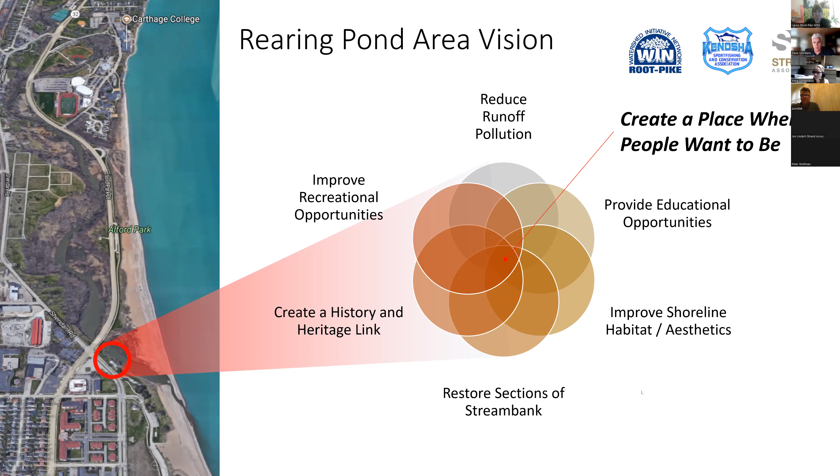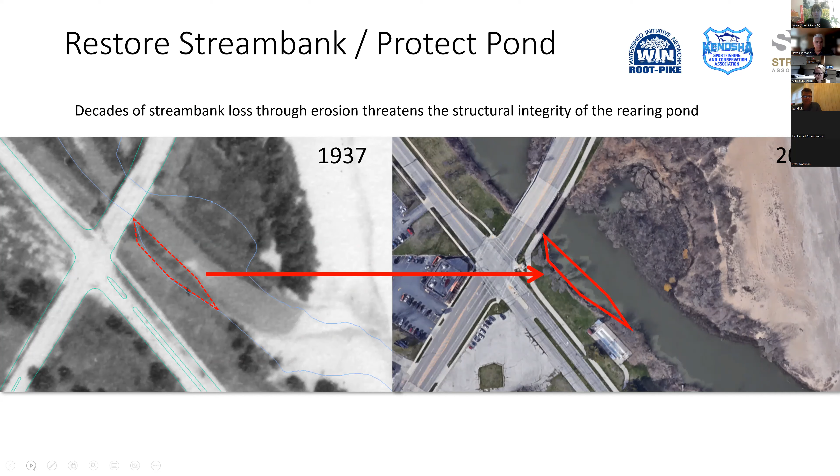So there's a lot of runoff pollution as well. I grew up in Kenosha, spent a lot of time on these beaches. It's sad to see it in this state. And so a number of us have gotten together as part of the Root-Pike WIN initiative to try and deal with these issues.

So we're going to do some things with the shoreline, mainly eradicating some invasive species and getting natives back where they have deeper root systems. We're also going to look at educational opportunities that connect people back to the heritage here, this area.

You know, there are historical accounts that this area was really kind of discovered by an explorer whose horse fell in the river. And the next day he saw a canoe by the shoreline and decided to take that upriver and thought this was an incredible place. And hence the founding of Kenosha, or the place of Pike. So there's a rich history there. There's an awesome history, and we want to be able to tell that through some interactive, some signage and things like that.

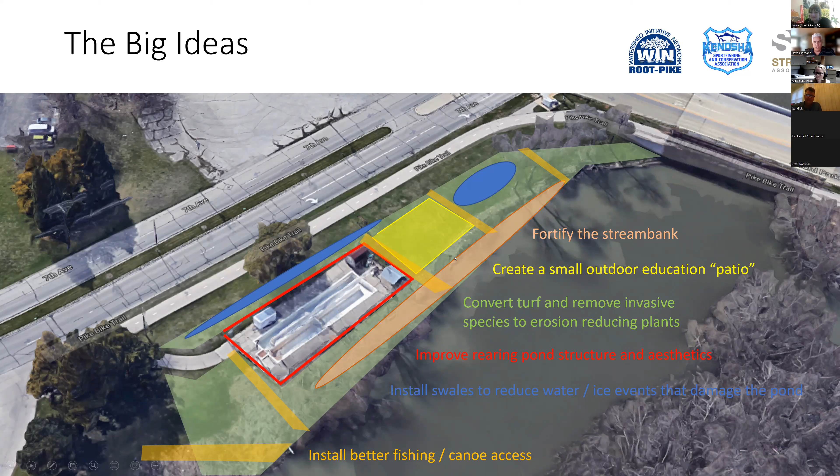Jim? All right, now can you hear me? Yes, okay. We can.

All right, so a little history of the pond. The pond started in 1973. A gentleman, his name escapes me, but he tried 3 times to show the DNR how a rearing pond is needed for increasing fisheries for the rivers and lakes, for Lake Michigan. So the club, Kenosha Sportfishing Conservation Association, was formed.

So the pond was built, there's 1,000-foot well water that comes into the pond. It is fed from a natural water base. It's the only well-driven rearing pond in all of Southeast Wisconsin and the entire state. In fact, we have the only effective well-driven pond. And back in 2010, the green hose you see to your left here is an imprinting program that was started.

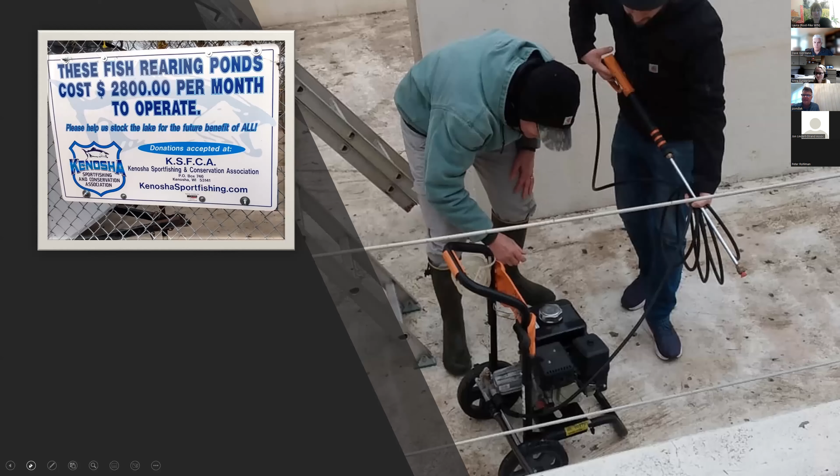The Sportfishing Club is a private club that is all funded privately by area donations. The people that you're seeing in this picture, just to run the pump for a 4-week program is $2,800, and that's just electrical use. The rest of the money that was donated is all by volunteers, power washers, sprayers, volunteer hours, the feeding of the fish and the releasing of the fish and the cleaning up the pond for its winter hiatus for next spring.

So this pond is only operated with the DNR giving us the fish and food. The rest of it is all done by the Kenosha Sportfishing and Conservation Club, which is a club that's been around since 1973. I did some numbers today. We're at 1.9 million fish reared in Kenosha since 1973, which brings anywhere from $3.5 to $4 million of tourism yearly to this area. People from all over the United States come for charter fishing.

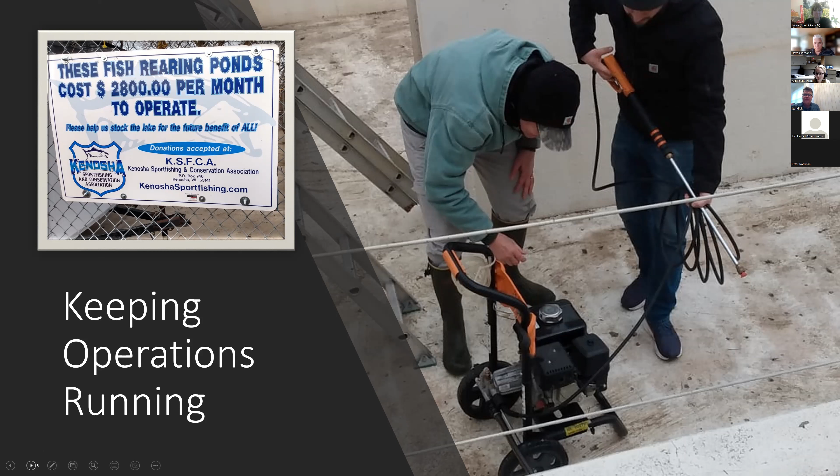People come for shore-bait fishing. People use the hotels, the restaurants, even the area businesses of shops also get visited by people from as far as Germany. So what you're seeing here and the tubes you're seeing is that the fish come in from the DNR Wild Rose Hatchery, and then we keep them for 3 or 4 weeks.

It depends on the DNR, but our well water is so unique. It's at 52 and 52.5 degrees consistently. Our well water is the best water these fish could ever be reared in. So we give the fish a supplement of food that the DNR supplied us. And as we finished this year, our fish grew 1/4 inch in 3 weeks. So we had one of the healthiest rears that we ever had in a very long time, according to the DNR biologist that gave us the data just recently.

So our club is privately held. We go out and seek fundraising. What we feel brings this community closer on the pond is the fishery, and the fishery is beneficial. As we all know, it's nearly a $1 billion industry, and it benefits the city, the Kenosha area businesses, and also, not to mention, the education of kids and the next generation of fishermen and fisher ladies that come in and enjoy what we're doing. So at this point, that's where our Kenosha starts at.

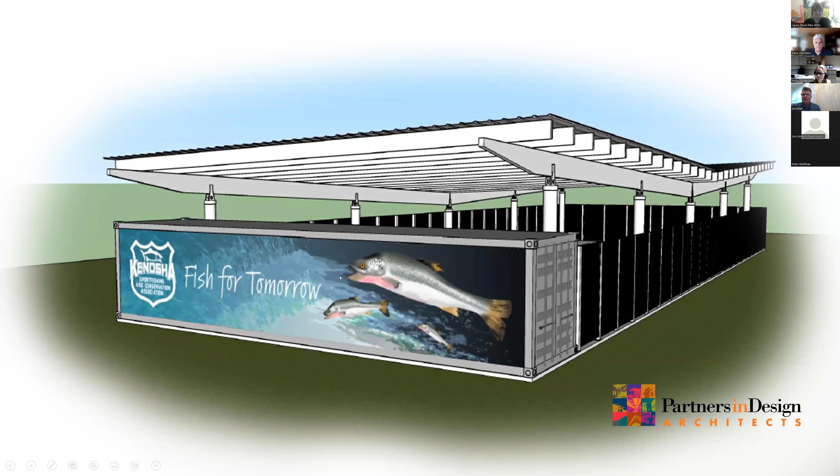So the reason we want this to be where we're at is that we have to teach young kids and students about where the fish come from, how do they start, where do they end up, what's their return rate, what are these fish all for? Well, the Sportfishing organization is about the community, and this is a community-driven pond. This is not just about a bunch of people enjoying one thing, but it's about community, bringing people together, people enjoying the idea that they're rearing fish that are going to come back in 3.5, 4 years, and they gave them the best opportunity at the infant stage.

So the fingerlings left here at about 5/8 of an inch longer than when they came in. So that's where we're at right now today. So at this point, the pond is of age, it's been around since '73, and it's been out in the environment, and it's done very well.

But if you want to keep something as prestiged as this pond is and keep the river going with the return of the salmon, this pond needs to be one of those iconic things that need to be, not saved, but more or less preserved, because the fact is that this is a heartbeat of Kenosha, and without the pond and its...

What is happening with the local sport fishermen's organizations is, and let's just say it for what it is, it's hard to get kids and young adults involved in sport fishing just because of all the extra electronics we have, but we are working to get children, young children, moms and dads involved out in the Great Lakes. And so that's how this all started.

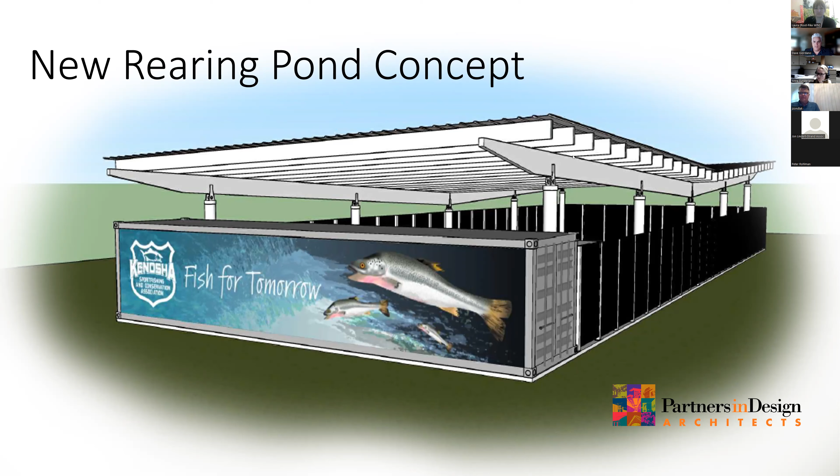So I am going to now share my screen with you. Are you ready? Yes. All right. Let me know if you can all see that. There we go. Looking good. All right, awesome. Thank you, Dave.

So I am going to be focusing on the area around the rearing pond. So where Jim talked about the pond itself, we also have ideas for the surrounding area. Like Dave mentioned, we really want to make this a place where people can come and learn about the environment and become kind of reconnected with this area that's so important to Kenosha.

So the existing Kenosha Rearing Pond area presents opportunities for environmental restoration and recreational improvements that Dave kind of already touched on. I know you've all seen some photos of the site already, but we wanted to show an overview site to orient everybody before we show the actual concept plan.

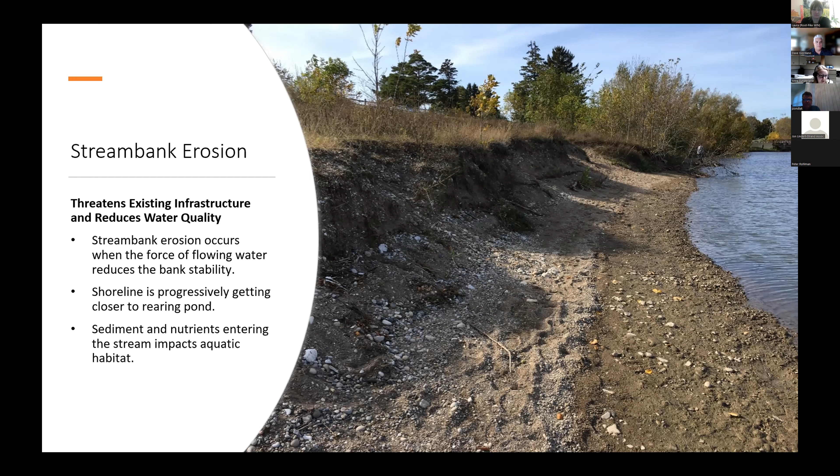In addition, sediment and nutrients entering the stream because of erosion impacts the aquatic habitat. This photo is of the site. You can see there's quite a bit of exposed soil. So as that runoff comes through, that soil then is discharged into the river, and any type of pollutant that is kind of embedded in that soil is then released into the river as well, which greatly impacts the aquatic habitat.

The next option would be a boulder revetment, which is very similar to a vegetated boulder revetment, but you can probably guess that it's not meant to have that vegetation coming up through the actual boulders. So this certainly is a more armored look, but can definitely help prevent that erosion along the banks.

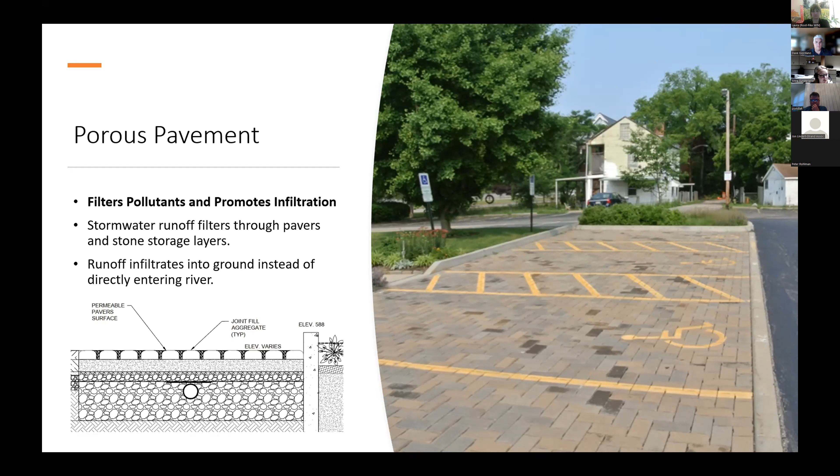So sheet flow and storm sewers carry pollutants and degrade the shoreline. Currently, these storm sewers carry sediments, oils, heavy metals, trash, bacteria, and fertilizer, everything that Dave already mentioned. And that's an issue because it's carrying all of that directly into the river without any treatment. Additionally, outfalls and sheet flow can erode shorelines.

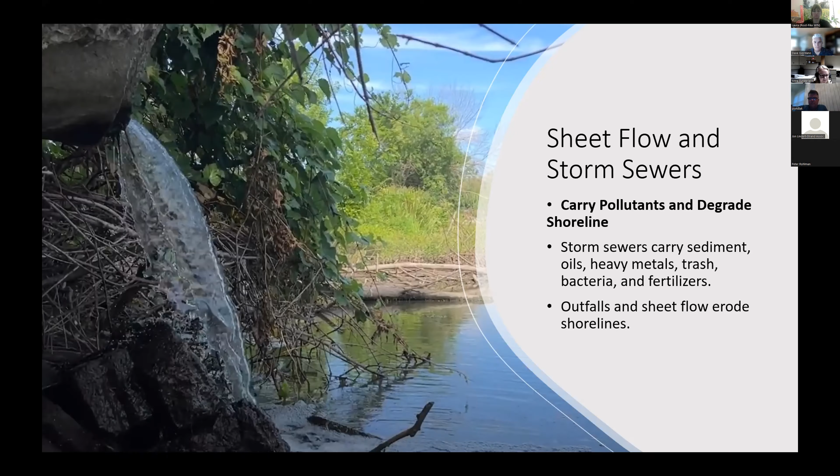So bioretention basins and rain gardens store and treat the runoff prior to entering the river. There's definitely a theme here of stopping that runoff and allowing it to be treated and infiltrated prior to getting to the water resources. But the plantings in these basins can help filter pollutants, and they can also create habitats because they are native species. And then additionally, runoff is stored and infiltrated instead of getting to the river.

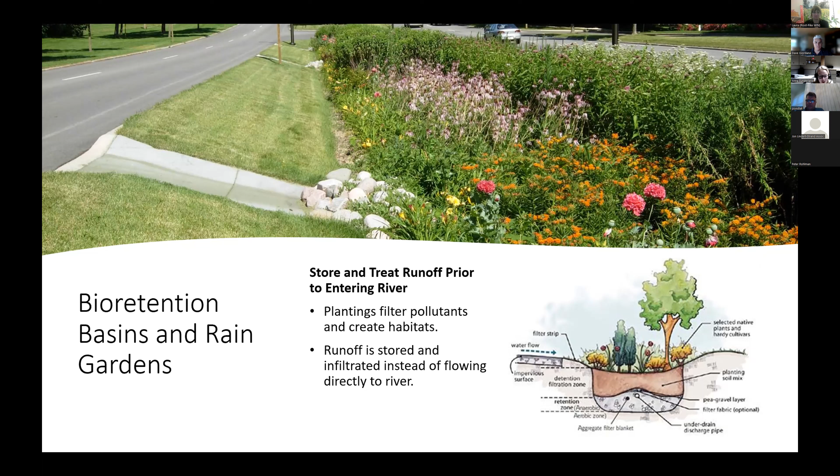As you've probably gathered from some of the other slides, currently untreated storm sewer outfalls are polluting the river and the lake. There's 3 existing storm sewer outfalls on the site, all ranging from 24 inches to 30 inches in diameter. And these sewers carry pollutants and trash from the larger watershed.

These are relatively large storm sewer outfalls, so you can imagine they're collecting quite a bit of runoff from the city, and everything that is found on the streets and the parking lots eventually makes its way to these outfalls. And so currently the storm sewers at this site flow to the river with no treatment.

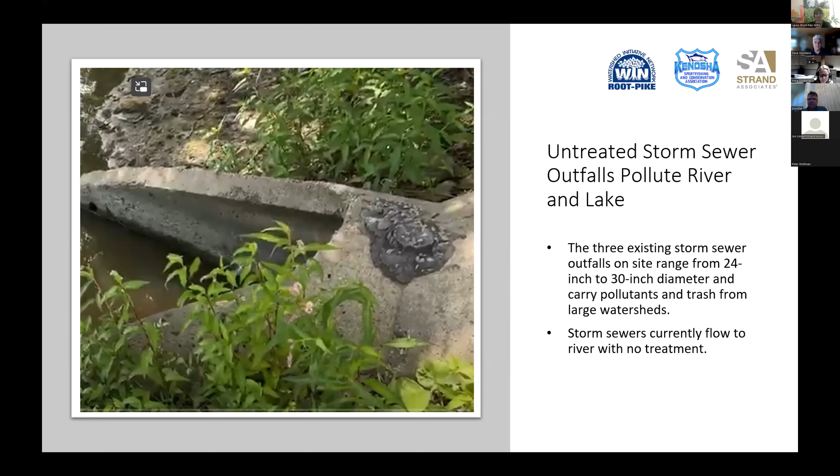So end-of-line treatment options help filter out sediment and pollutants. The devices are installed at the end of the storm sewers and help treat that runoff before getting to the river. A couple options for these end-of-line treatments include hydrodynamic separators and baffle manholes, which I'll explain. But all of these devices do require some maintenance. About 2 to 3 times per year, they do need to be cleaned out so that their function is maintained moving forward.

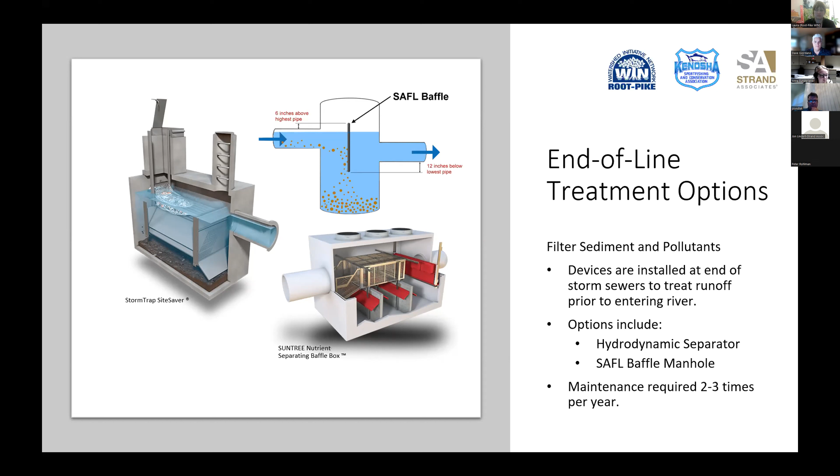All right, next item is moving more into the recreational opportunities that were mentioned previously. First, starting with the fishing / observation area. We have it placed on the northern edge of the site, but this could certainly be moved to a different location depending on feedback. But right now at the site, the shoreline issues impede fishing access. And this lack of dedicated access promotes illegal fishing.

As you've seen from the photos, there's quite a bit of dense vegetation, so it is difficult to see if people are fishing illegally along this stretch. It also creates safety concerns. If there's no designated area, people will just walk wherever they can. And with the steep slopes of the eroding shoreline, this can definitely be a safety issue.

And then lastly, the lack of fishing access leads to environmental degradation. People just walking wherever they want creates more erosion from foot traffic. As I'm sure you all know, you've seen footpaths being formed in different locations, and that can definitely further the erosion, especially in an area that's already being eroded by the river.

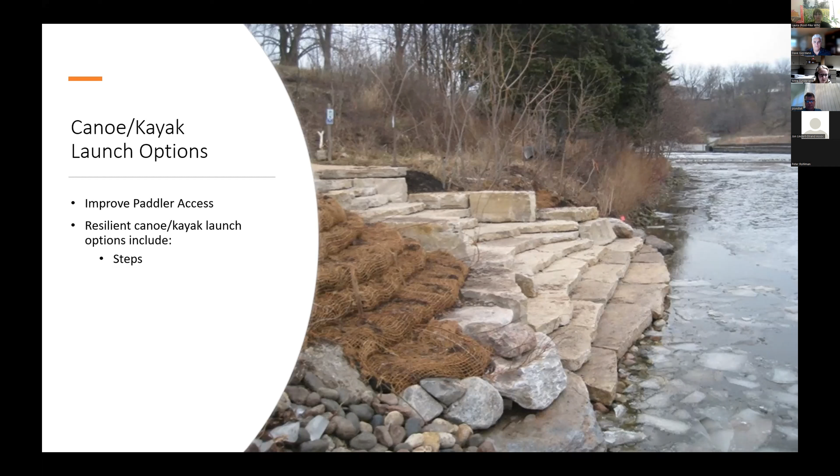So we wanted to talk through some canoe and kayak launch options that would improve the paddler access. So a couple resilient options include steps. That's what's shown in this photo here. So it's just stone steps leading down to the river where people can put in their canoe or kayak at the last step and then step right into their boat. This is definitely a more armored solution and would stand up to some of those forces of the river.

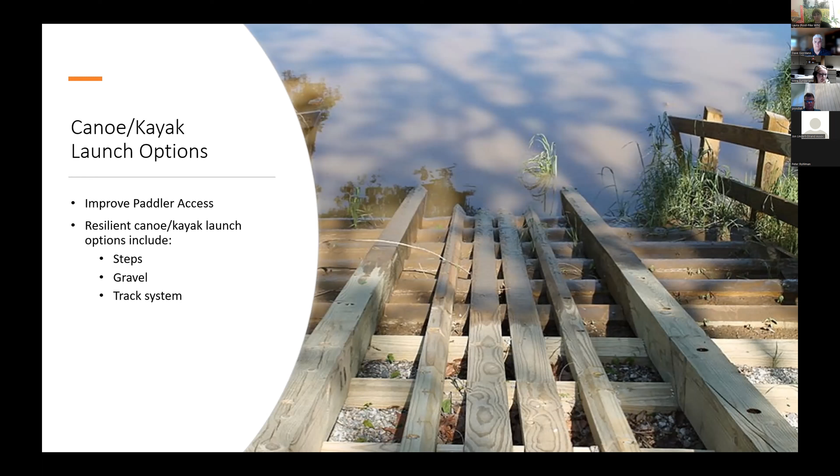Next system, which Dave showed a photo of already, is a track system. We've seen these as wood or metal, but essentially paddlers can bring their canoes or kayaks and put the boat in the water down the center track system that you can see there. And then there's steps on each side for people to walk the boats down and get into the water.